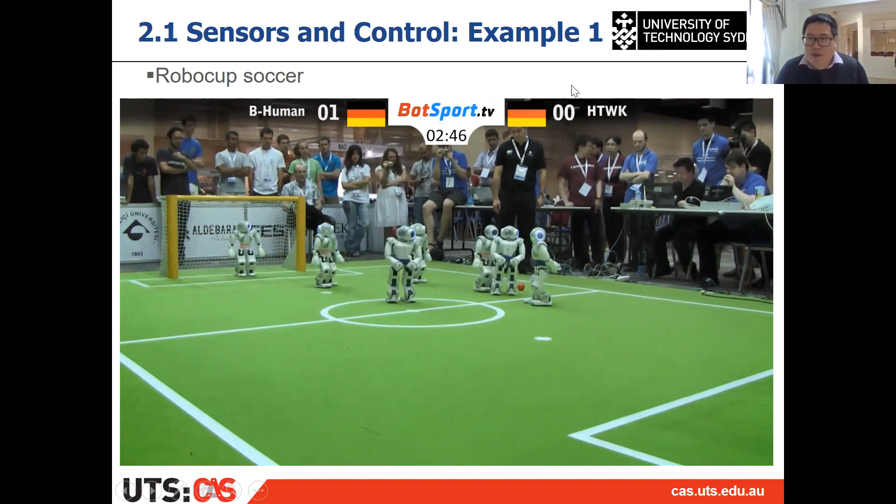The other one is on the CPU, called LSD SLAM. Do you know what SLAM is? SLAM means simultaneous localization and mapping. That is mainly the eyes for the robot. In SLAM, we need to use sensors to sense the environment and build a map of the unknown environment, and at the same time use the map to locate itself.

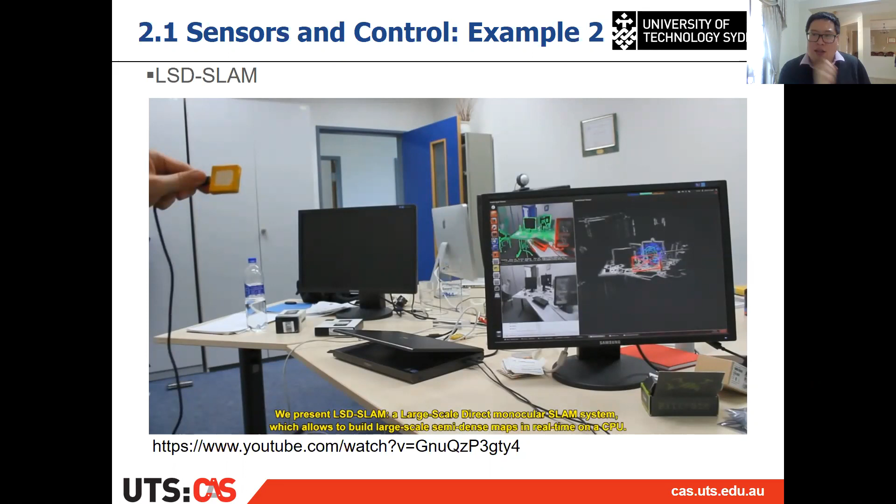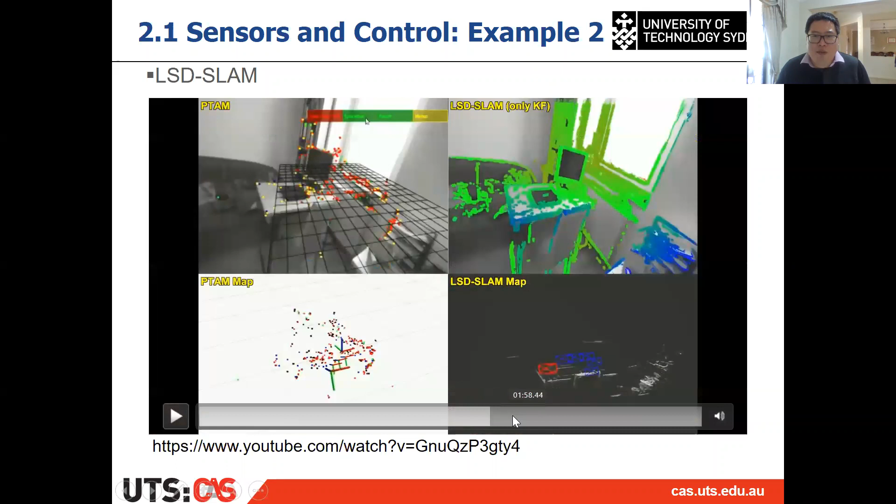You can use the camera to map the environment and also locate the camera itself. You can see the blue ones are the camera pose, and the green dots are the environment - the structure of the environment reconstructed as the camera moves.

That's the second video example, and the third example is also SLAM. But LSD SLAM is a semi-dense SLAM, and it's using a stereo camera instead of a single camera. They use the stereo camera, which means at the same time you can have two images from two cameras, and then a much larger scale can be reconstructed using the proposed SLAM algorithm.

So it's autonomous driving, like town scale or something. As you drive, you can reconstruct the environment, and it can locate the camera, or the car itself. You can see the reconstruction of the surrounding environment, and it's a very large scale - that's the detailed view. So that's example 3.

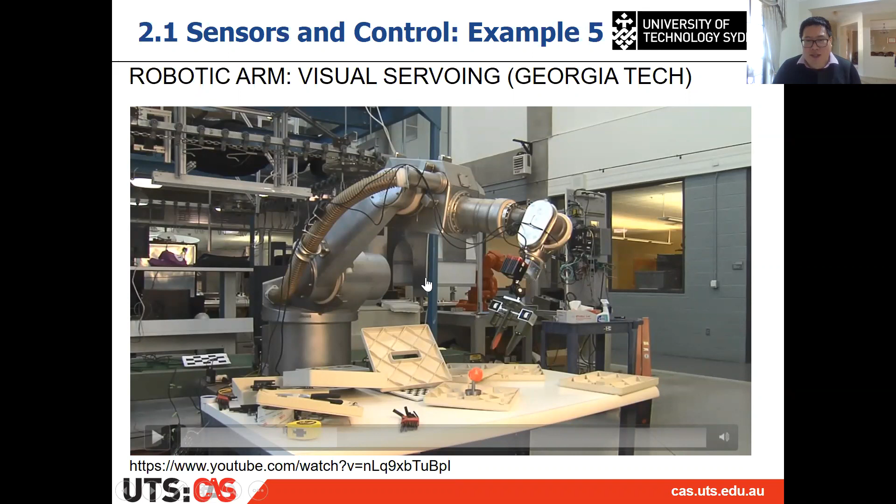They use the camera on the end effector of this industrial robot, then they want to use the information from the camera to control the robot to pick up something. For example, if you have an object in the environment and don't know its location with respect to the robot base, it's quite hard to pick it up. But with the help of the visual sensor, it can do this kind of control - that's visual servoing. The other one, example 6, is also visual servoing.

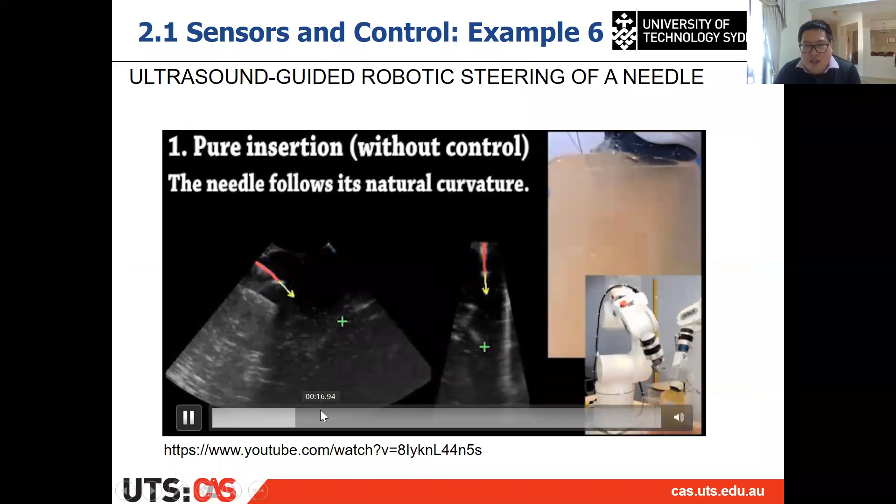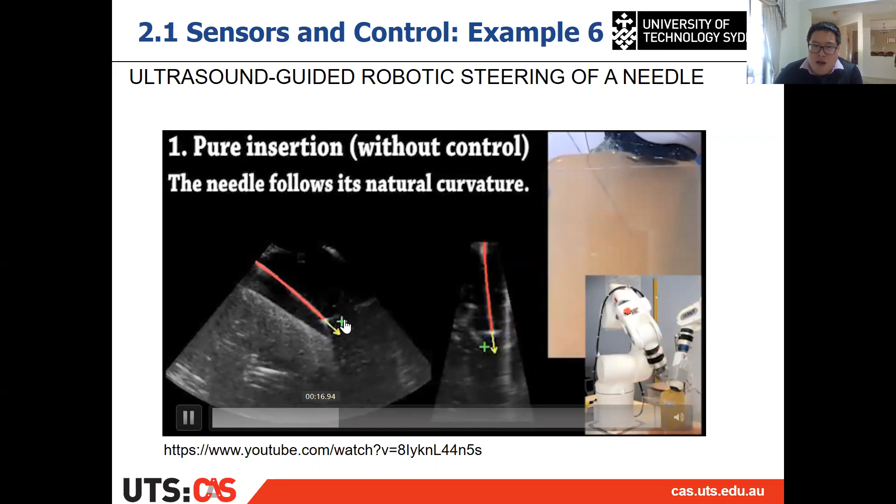It's also the visual servoing, but it is on the application of a medical case. So if you want to do the biopsy, you want to insert needle in the soft tissue. Even you have a very good plan about the trajectory, but because the soft tissue can deform, it's deformable soft tissue, the trajectory may not be the same as what you planned, and it probably cannot reach the target location. With the help of sensing techniques, can do a feedback control, which can reach the targeted location. So those are the 6 examples I listed, and that's the discussion.

We are not discussing in groups, but try to think about questions for each of the examples. I make it in some groups because they are close to each other. The first one is example 1, which is the robot soccer, and the second group is example 2 to 4, which is LSD SLAM, stereo LSD SLAM, and building Rome in a day. And group 3 are the 2 visual servoing ones, remember.

All right, so the questions are: first, what sensors are used in each of the examples? The second question is what kind of things the system can achieve? And the third question is how it can be done. All right, so those are the questions. Please think about it for 1 or 2 minutes.

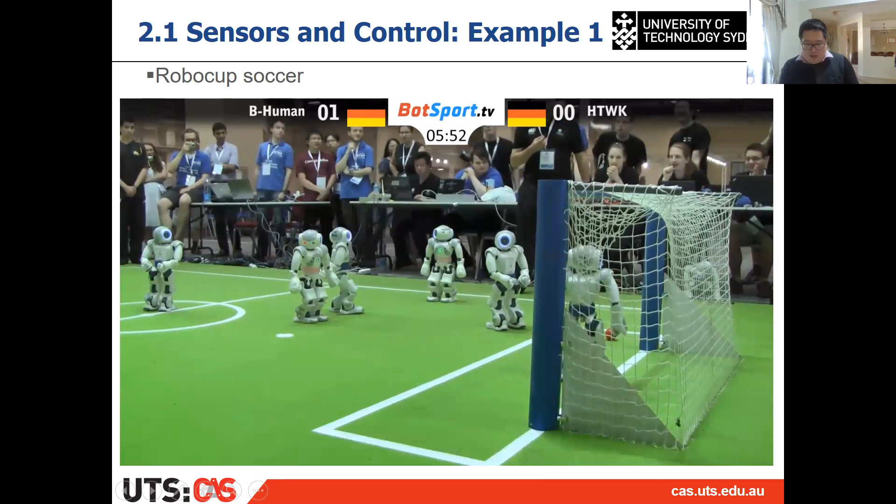So for example 1, let's go back to that. That's the robot soccer. Sorry about the sound. That's the robot soccer, so it's quite interesting. There are different levels of robot soccer, and at this level they use the robot they call NAO. That's a robot, I think it's from a German company.

And for that level of robot soccer, they all use the same robots. Then they will program on the robot, and they will play with the soccer. And again, this is not teleoperating, all right, it's not teleoperating, so everything will be on the robot itself. Which means we need to program with some algorithm or some control to control the robot to play with the soccer. But the good thing is inside the robot there's some control already in it.

For example, if the robot falls down, then there is a control to let the robot stand up. So some basic control is done already, but you need to do some kind of higher level control. For example, which direction the robot is shooting, where is the ball, and if the ball is there, what the robot is going to do, something like this.

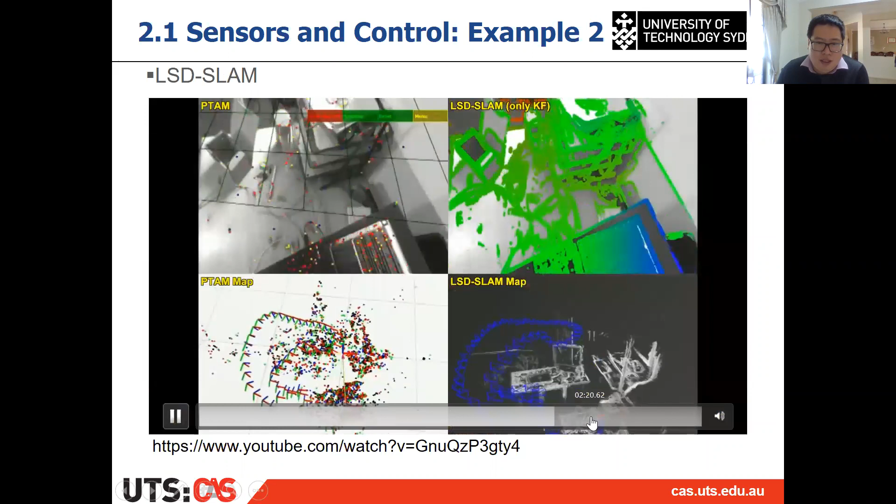So this is what they propose. They call it LSD-SLAM, or semi-dense mapping, localization, or SLAM. What sensor did it use? They used a single camera. It's a single camera, and they detect the features with higher gradient on the image, and try to build the map of the environment and also at the same time calculate the 6-DOF pose of the camera itself. So that is example 2. How to do that? That's a SLAM problem as well.

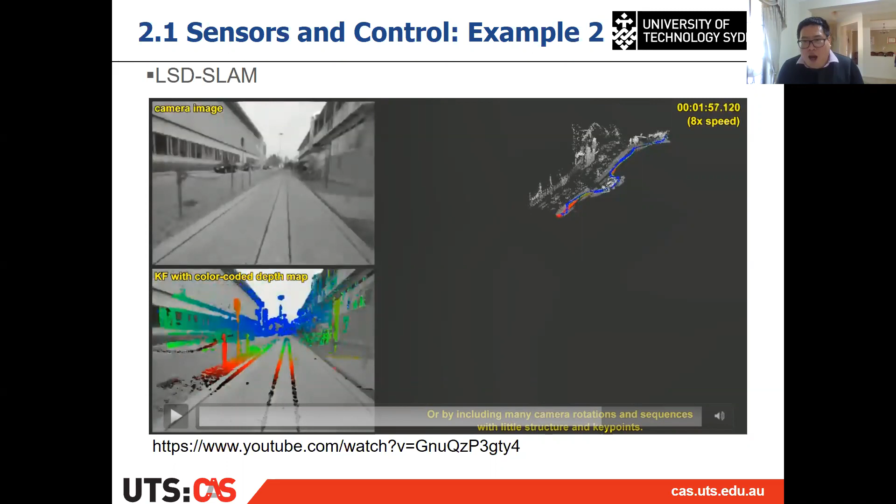Okay, so example 3. The differences between example 2 and 3 is mainly about the sensor. Here, the sensor used is a stereo camera instead of a single camera. A single camera we call a mono camera or monocular camera. So by using a stereo camera instead of a monocular camera, let me ask you a question.

What's the difference? What's the main difference between a single camera and a stereo camera? Think about that. Feel free to unmute yourself and answer the question or talk. So what's the difference between a single camera and a stereo camera? It's quite obvious, one is a single camera, the other is two cameras, right? But what's the difference behind that? What's the difference from using a single camera versus using two cameras together?

Yes, I got a lot of very great answers on that. The difference is about the depth. That's 100% correct. So why is that? I'm going to introduce a little bit in this lecture, but following, I'll let you know why it's about that, and also in the next lecture, I will show you the principles about stereo as well.

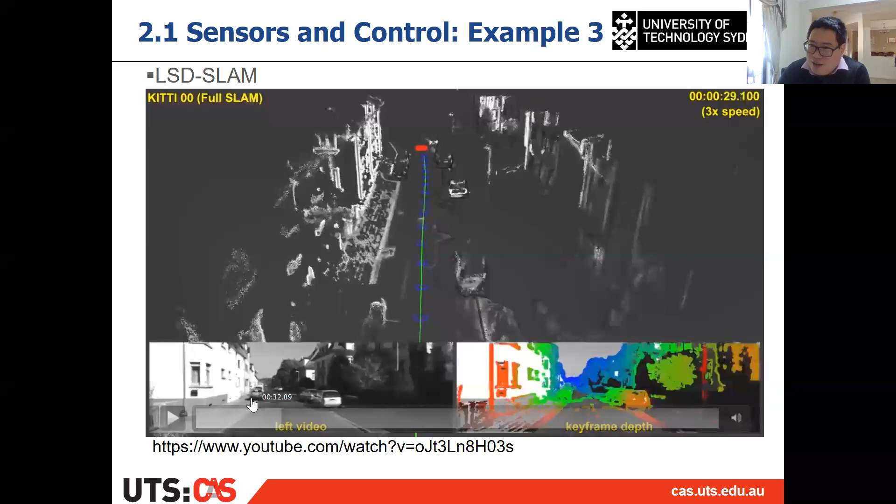If you come to the LSD-SLAM, these are estimated from a single camera. So suppose we can't get the depth from a single camera, but how can we do this reconstruction? Think about that question and answer that to me. Supposing we have a stereo camera, then we know the depth. But even by using a single camera, we still can do this kind of reconstruction, which means we still can recover the depth. So how can this be done using a single camera? Think about that, and give me your answer.

Yeah, try to think about that. It's a good question, right? It's quite interesting. It's some kind of question about what kind of information we can get and what we can achieve based on that information. Yeah, I think I got some answers. Yes, I think I got a correct answer.

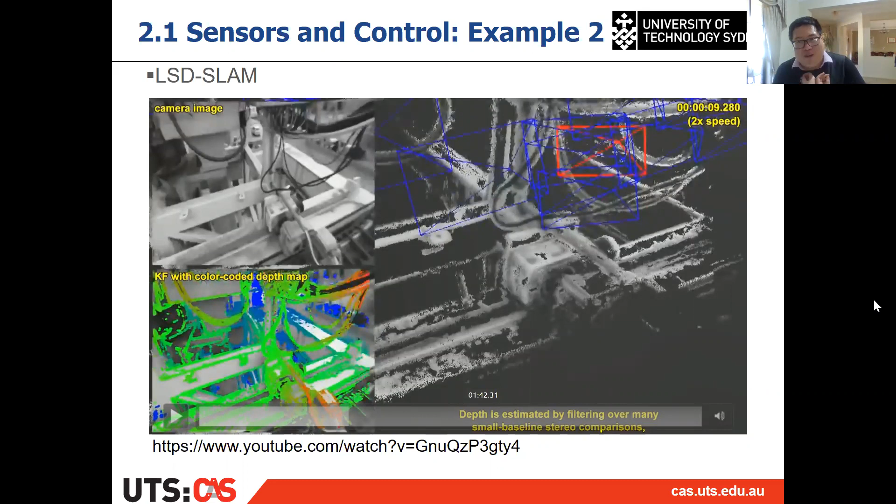I talked too much about those, but when you have a chance to work on those sensors, you get a better feeling for it. So those are some reflections from my experience. All right, let's move forward.

All right, the next one is visual servoing. Let me come back a little bit. Visual servoing, we definitely have a lecture about it, I think lecture 10. So if you are interested, go to lecture 10 and see the video recording about that.

As I mentioned before, visual servoing is some kind of using a camera or vision sensors to help control the robot. For example, if you close your eyes, you don't know where the phone on the table is. But you open your eyes, you see it, and you take it. It's quite similar in visual servoing. Suppose we want to control the end effector to pick up something, like a ball, but we don't know where the ball is.

Then we put the camera on the end effector, and by using the image information from the camera, we can adjust our control to pick up the object. So that is visual servoing. The sensor we use is the camera, and what they want to do is use the camera to help control the robot to accurately pick up something and do some tasks. We are going to introduce the principle of visual servoing later in lecture 10.

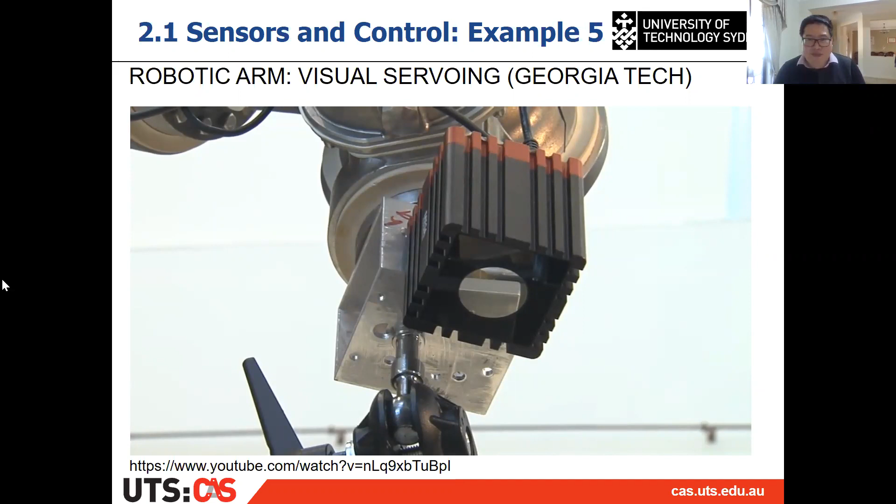Yeah, this is just what I want to say. All right, so let's move forward.

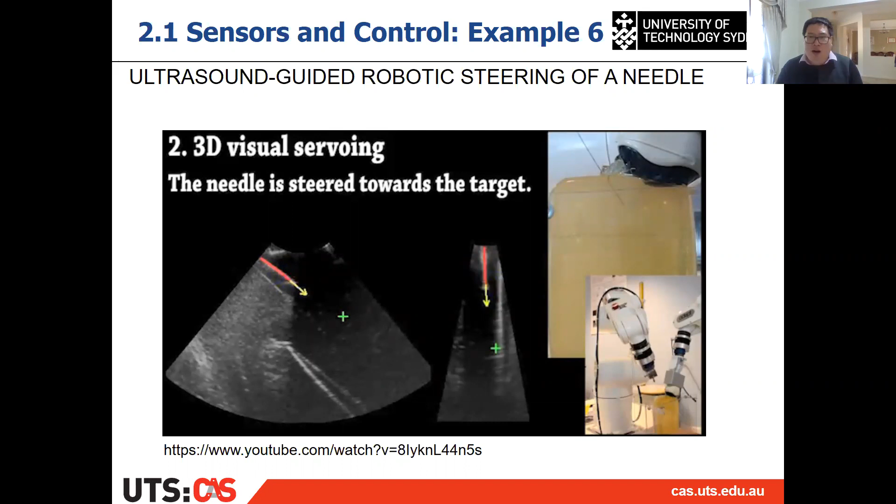All right, so those are the answers from my point of view for activity 1.

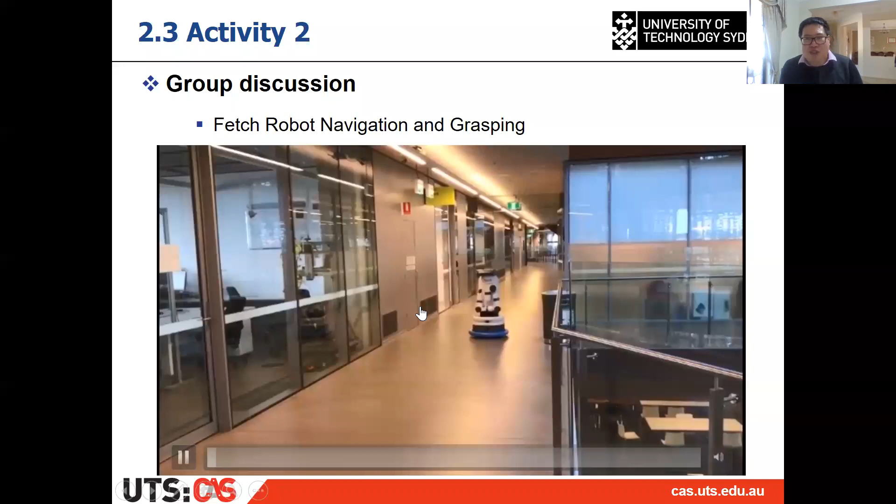And then we also have activity 2, but I'm thinking not to discuss that now. That is homework. We are going to discuss this in the next lecture.

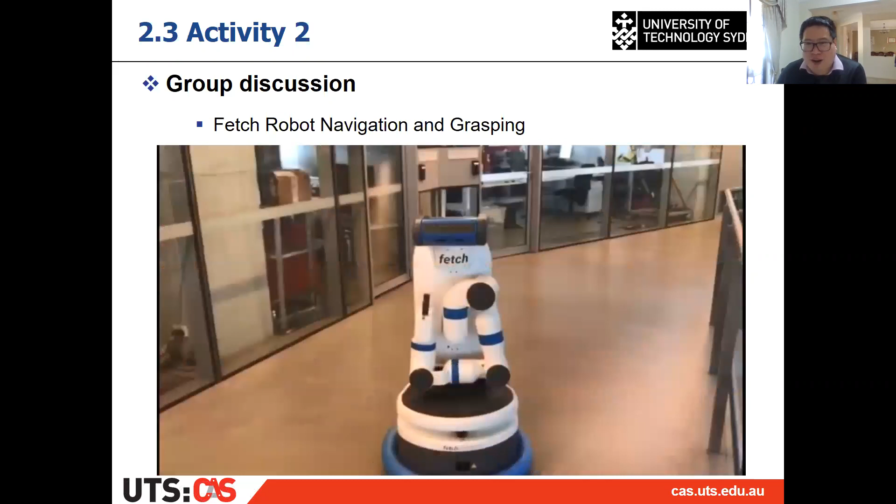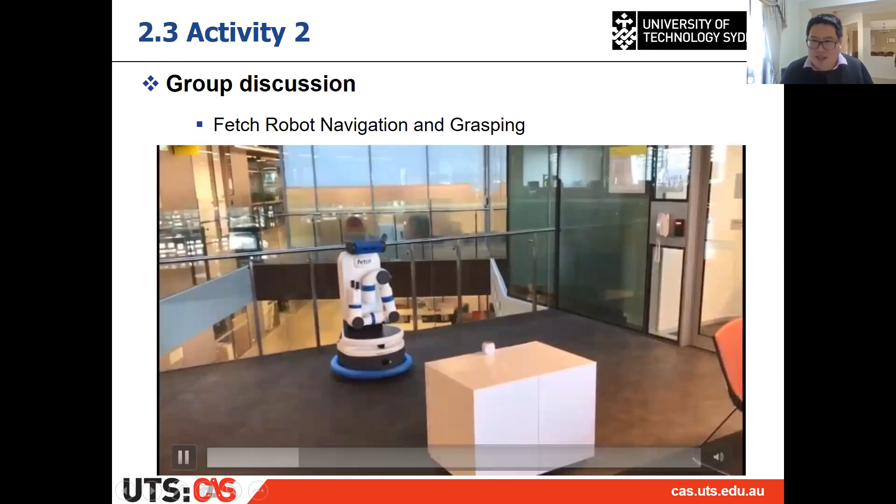This activity is about controlling a robot. As you can see, we have a Fetch robot in our center, and we have some projects about controlling it. If you choose the Fetch robot, you'll have the chance this semester to work on a real robot. But before that, you need to test out. Let's talk about it a little bit later.

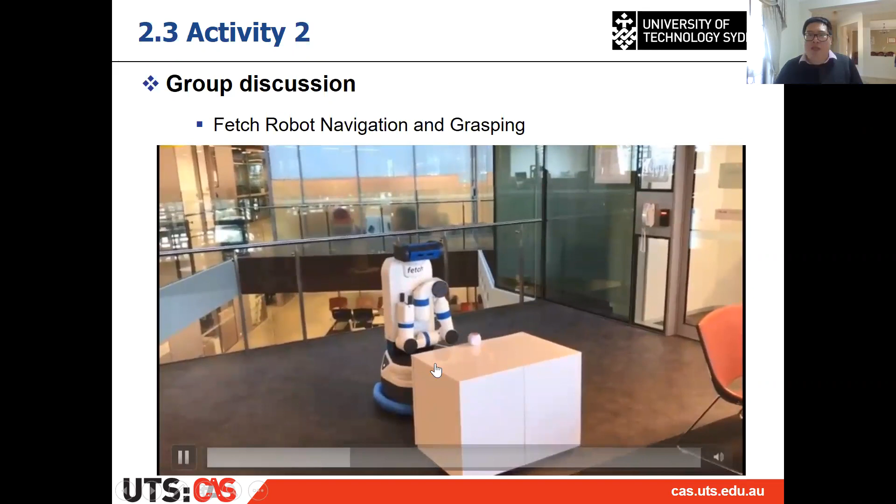So the robot starts from an arbitrary location, comes to the table, and tries to pick up the object on the table. We are going to answer questions similar to what we had before.

Think about that. Those kinds of questions help you divide a project into details. For example, if you have a project making an indoor robot starting from a charging place, going to any location, picking up something and delivering it to people, suppose you want to do this kind of project in a future career. What do you want to start with? You need to think about how many problems are involved in this kind of application, and divide it into small problems. Then for each problem, think about what kind of sensor and what kind of control method you're going to use together to solve it. After that, you know how to solve the problem and finish the project. This activity tries to let you have a general feeling, a general understanding, and thinking about what you're going to do if you have a project. I believe you will definitely use that in your group project.

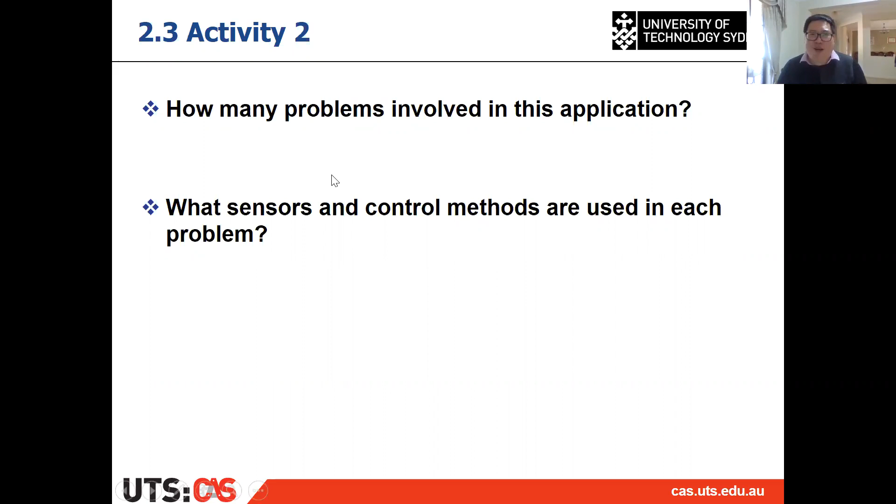All right, so that is what we have for the last lecture. After that we have some introductions of sensors, and I'm not going to talk too much about that. I believe you watched the video as well.

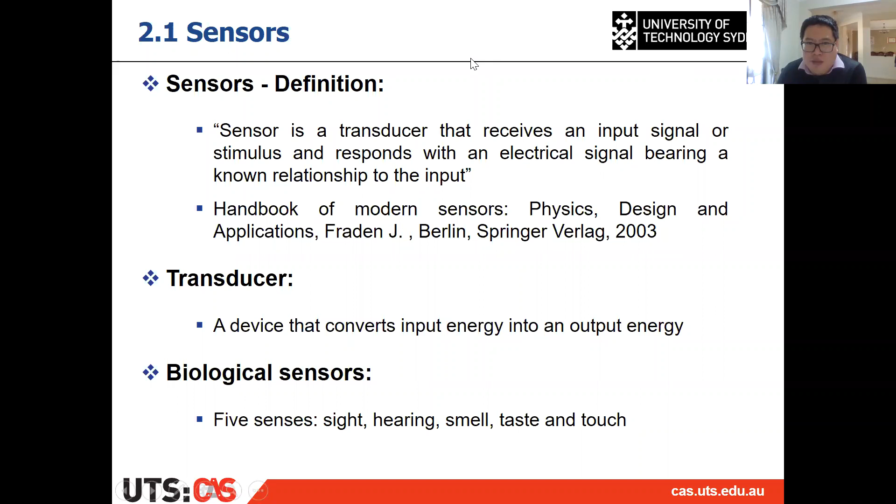Then after the introduction of sensors, we mainly want to talk about cameras first, because camera is the most commonly used sensor we have in robotics or mechatronic systems. It's quite easy to get, quite cheap, and it provides you very direct information of the environment. It's quite close to what we have from our eyes. So the camera is really, really commonly used, and I don't want to introduce all of them.

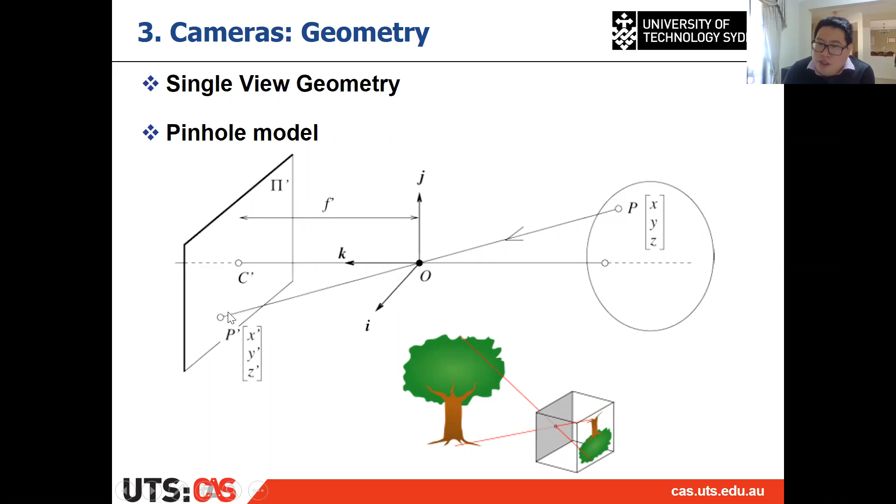Remember that. Then based on this pinhole model, we derive: if we have a 3D point, how can we calculate its 2D location on the image? If we rotate the image from the back of the camera to the front of the camera, we get the pinhole model set up like this.

Suppose capital X is the 3D location of the feature point in the environment, then the projection onto the image is small x. It lies on the line between the camera center and the 3D point. Now let's think about how to calculate the location.

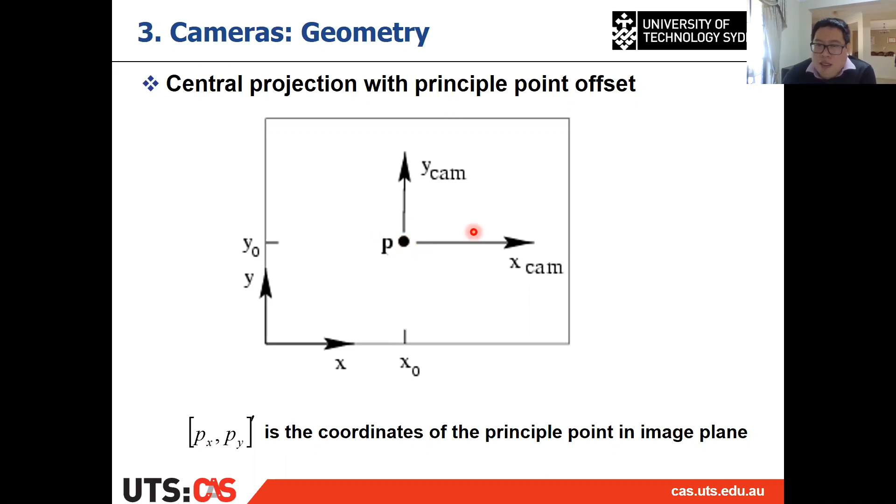If we know the location of the principal point as Px and Py already, then it's quite easy to do. We just need to add Px to the x coordinate we calculated, and add Py to the y coordinate we calculated. This is called central projection with principal point offset.

By using this, you can calculate the small x, which is the 2D location of the projection on the image, in the image coordinate frame. So that is called central projection with principal point offset.

But this central projection with principal point offset, you can only apply when the 3D point is in the camera coordinate frame. So we're talking about anything in the camera coordinate frame, where we know what is y and what is z, which means this 3D point is in the camera coordinate frame.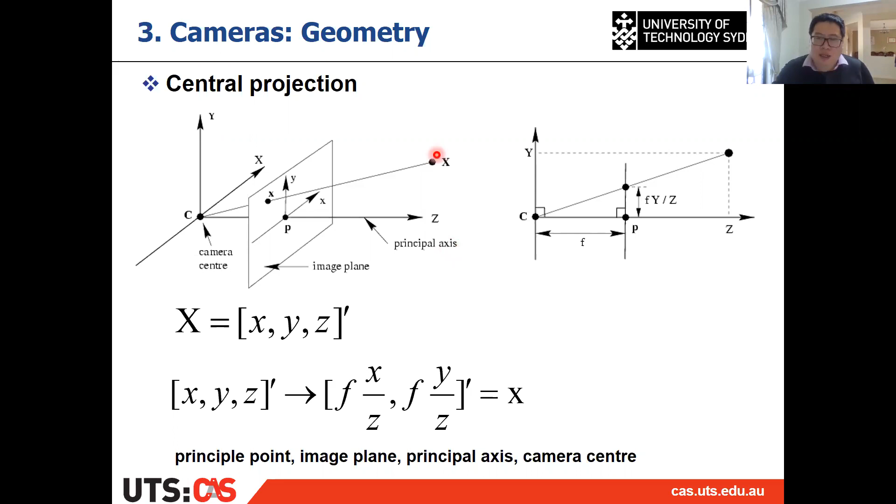So if you have a question in your quiz 1, quiz 2, or final exam saying I'm giving you a 3D point, and that 3D point is in the camera coordinate frame, and I want you to do this projection to calculate the 2D location, the 2D feature on the image from the projection, what you can do is directly use this central projection with the principal point offset.

So you can apply the second equation, but only if the 3D point is in the camera coordinate frame. If it's not, that's a general case, which I'll show you a bit later. So that is central projection with principal point offset.

Then I'm also going to introduce you to the matrix formulation. It is much easier when you apply it to coding and also some other things. This is the matrix formulation of the central projection with principal point offset.

Suppose you have x, y, z, which is the 3D location of the point in the camera coordinate frame. What you want to do is put 1 here to make it a 4x1 vector of the 3D point. We call it a homogeneous representation of a 3D point. By saying homogeneous, if you have a 3D point, you have 4 elements; if you have a 2D point, you have 3 elements. So that is the homogeneous representation: adding x, y, z, and adding 1 here.

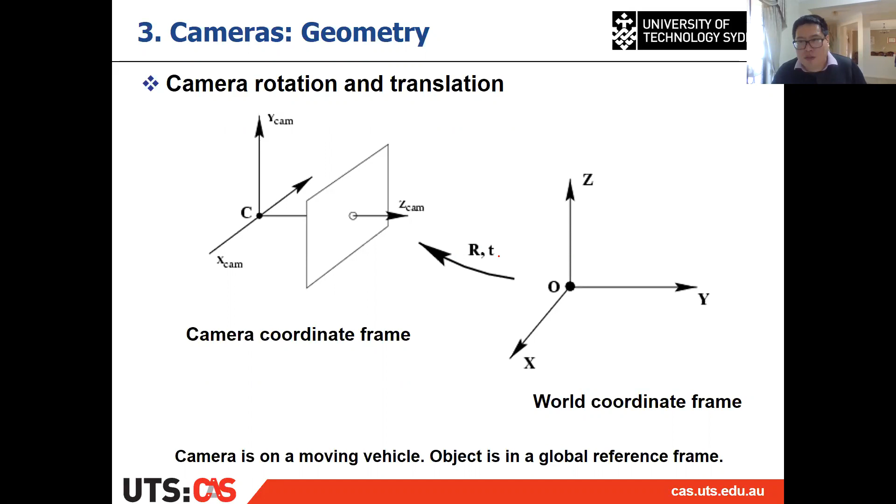So if we have the R and T, which means if we have the rotation and translation, which means if we have the pose of the camera, then we can transform the 3D point in the world coordinate frame to the camera coordinate frame. Then we can do the central projection with the principal point offset, as what we did before, right? And this is what we did. So we have this central projection with principal point offset, suppose we're having the 3D point in the camera coordinate frame, right?

But if we don't have it, it's quite easy, we can do the coordinate transformation first. So this is the coordinate transformation matrix, which is 4x4. And this is the point, the 3D point in the global coordinate frame, which is 4x1, it's homogeneous as well, right? Which is 4x1.

Which means if we have the pose of the camera and also we have a 3D point in the world coordinate frame, the first thing is we can do this transformation. We can do this coordinate transformation to transform this point from the global coordinate frame to the camera coordinate frame. Then we can apply the same thing. Right? Then this is the camera projection model.

That is the general camera projection model. So suppose a 3D point in the world coordinate frame, then what's the projection of that 3D point? All right, then we can rewrite that equation into this.

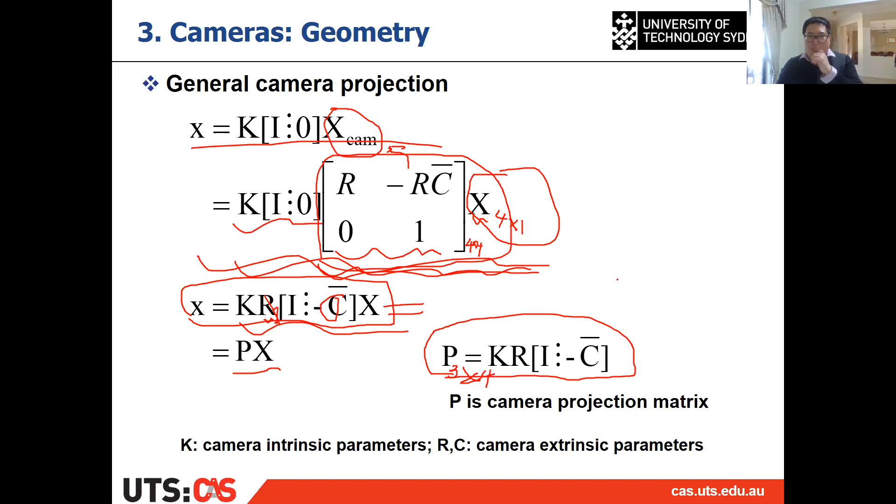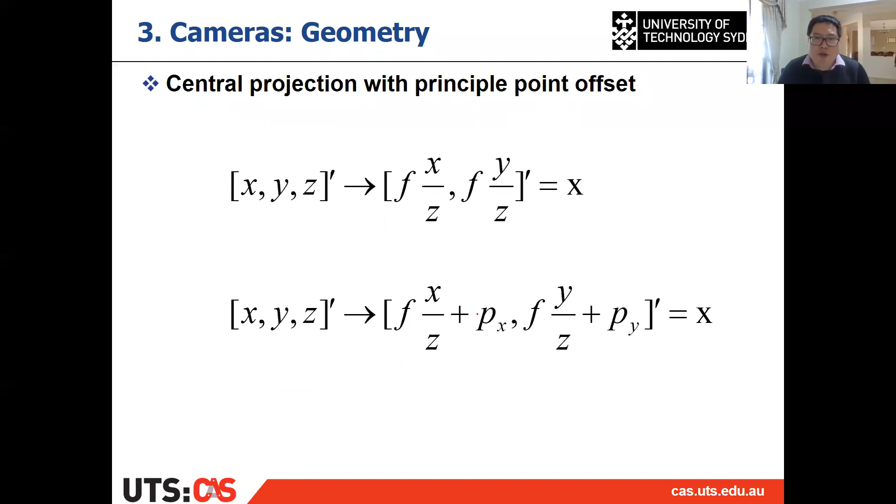All right, so those are the principles of the camera projections, and we do have an activity, so try to do this activity by yourself. And you can do the calculation by hand, or you can write a code about that as well. All right, and do try to practice on that by yourself, and make sure you know how to do this projection. All right, so try to write down equations and try to write the code. And I do suggest you try to write the code by both this normal equation and also the matrix equation as well.

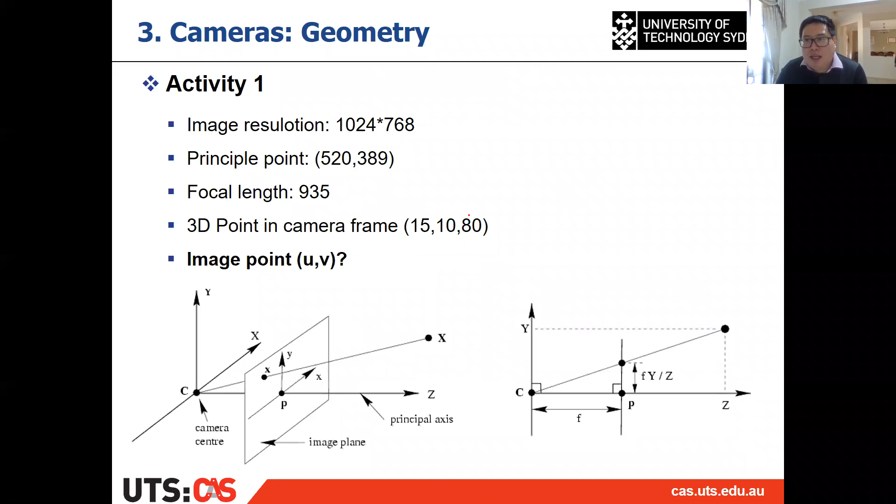Try to practice on solving the activity by yourself on that. And later in the tutorial, Marlene will show you how to do this calibration. So which means we only need to print this checkerboard and use the camera to have multiple images of the checkerboard. Then using the images, you can calculate the focal length and principal point, and also the distortion parameters as well.